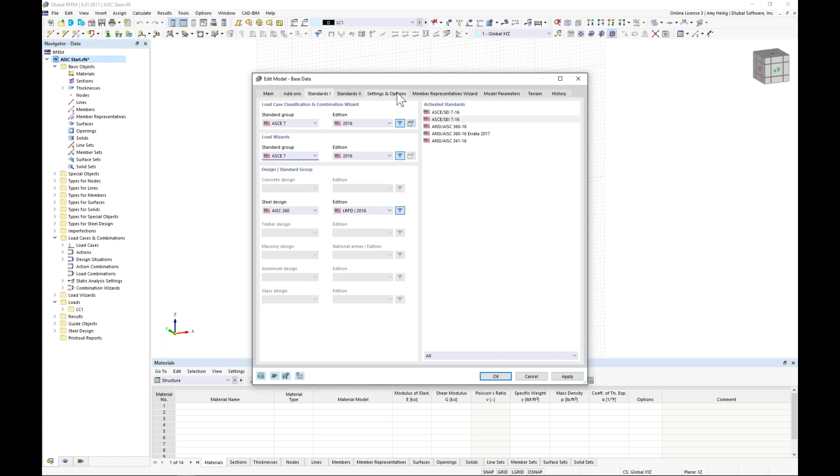Under settings and options, this is where we can orient our global and local axes - both are set to upward. I've also activated the member representative, which gives us the ability to group together members with common materials, cross sections, or member lengths. This will come into play a little bit later on.

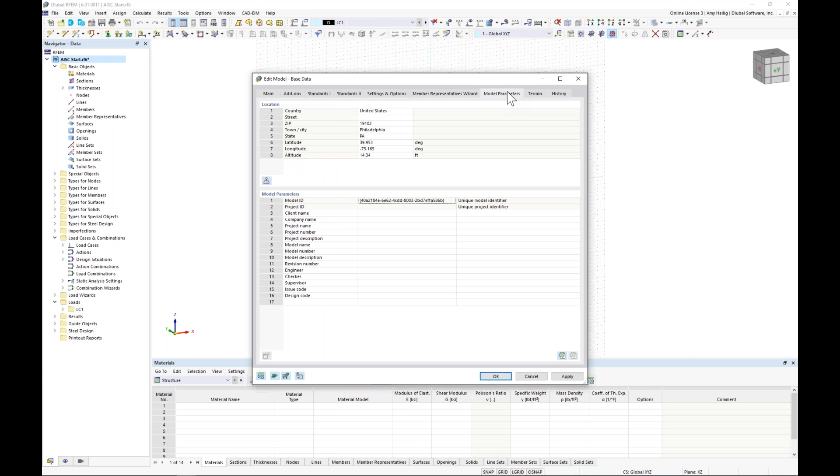Finally, we have model parameters, which gives us the ability to integrate with our GeoZone tool available on our website. For those not familiar with GeoZone, we have integrated various standards, including ASCE 7, the NBC standard, and many other international standards for snow, wind, seismic, and tornado loads.

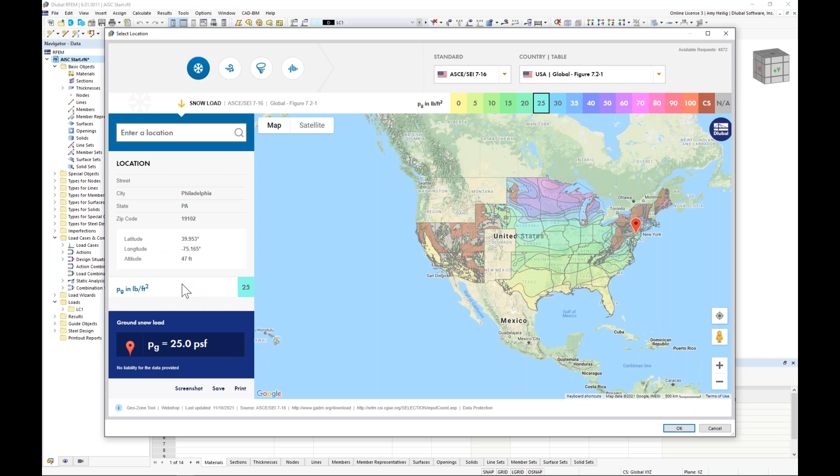This is further integrated with Google Maps technology, so we can simply type in our project address. I typed in Philadelphia, PA, and I have my ground snow load automatically given to me based on the maps provided within ASCE 7. This will be used later for our automatic snow load generator.

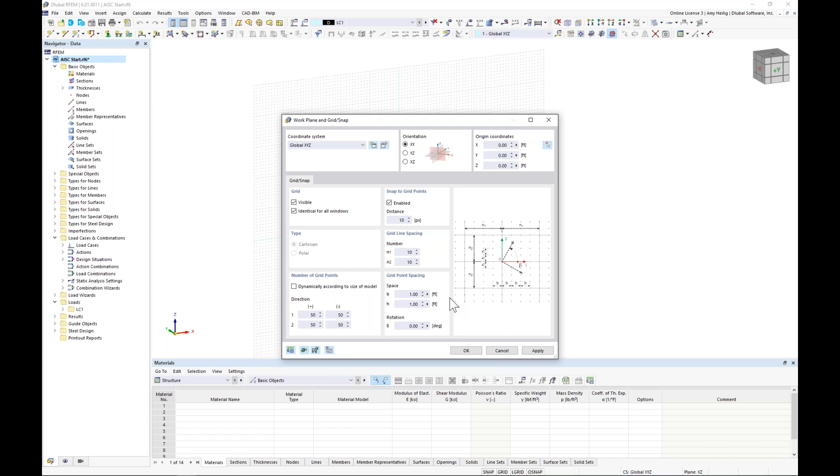Once we've set all of this input, we click OK to be brought into our model. Within the graphical interface, I have my drawing grid activated. Down here at the bottom I can right click to edit this drawing grid. The grid point spacing is set at every 1 foot. If we see anything other than this, we can always click here to reset the default back to 1 foot spacing.

We'll begin by drawing our first member, going up to our toolbar to draw a new single member. The member type is set to beam. The section is defined within my cross-section library, so I can activate my standard steel sections, and use the filters on the left to filter to the United States, the AISC 15.

And the W sections are now available to us here, where we can scroll down and choose a W14 by 48. So once I have my cross section selected, I do need to create a new material.

So in a similar manner, I'll open up my material database. I can again use my filters over on the left to choose the United States, the AISC 360, and we'll see here steel A992 available to us that we can click OK.

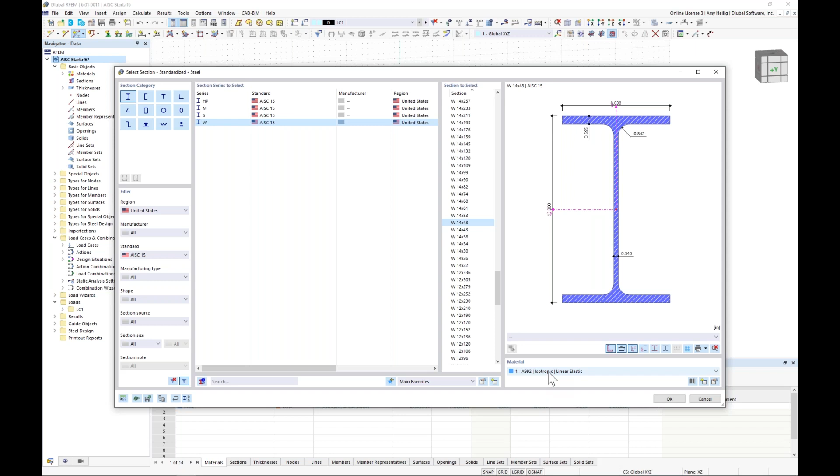Now this material is available for all members within the model. I don't need to redefine that material each time. I can just select it here within this drop-down box.

So once I click OK, I'm going to go back to this main tab here and deactivate the design properties. This is specific to steel design according to the add-on that we have previously activated. We'll get back to this later on, but for now, I want to deactivate this option.

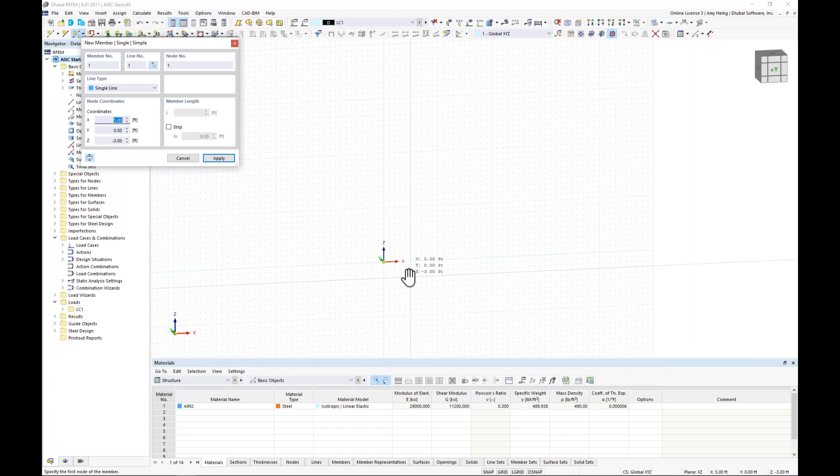So we'll begin with our first column by snapping at the origin here and a point 14 feet in the global Z direction. My second point is going to be located at x equals 40 feet, and then we're going to go ahead and choose again that same point of 14 feet in the Z direction.

Now I'd like to create a node that's really right at the center of these two nodes at the tops of my columns. For this, we have a nice feature within our drop-down box here that we can create a node between two adjacent nodes.

So what we can do is graphically select the nodes at the tops of my columns. And when I click apply, you'll notice we get a third node generated here. Well, this node is really dependent on these two nodes that we've selected graphically.

I can even take this column and move it around, and you'll notice that that node moves with it. We can also take this node, double click on it, and you'll notice the node type is set between two nodes.

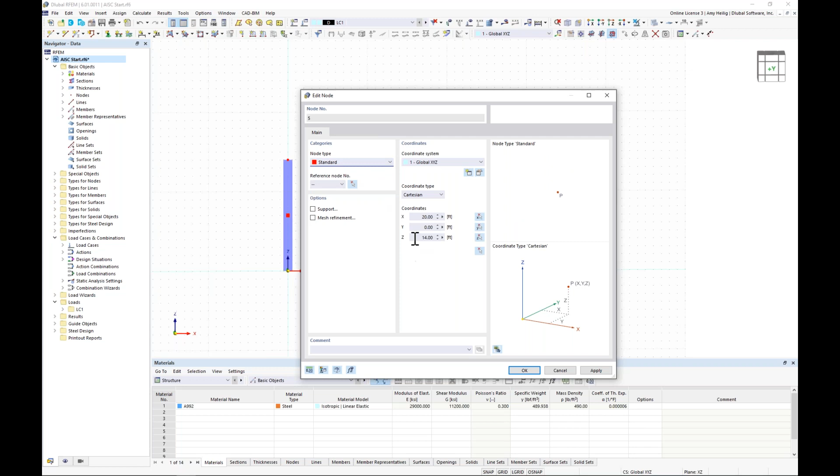Well, if we want to edit it, we can simply change this back to standard, and I can modify my Z coordinates to 16 feet in the vertical direction.

So we're now ready to generate our beams for our first moment frame. So I'm going to go to draw a new member once again. I'm going to deactivate the design properties.

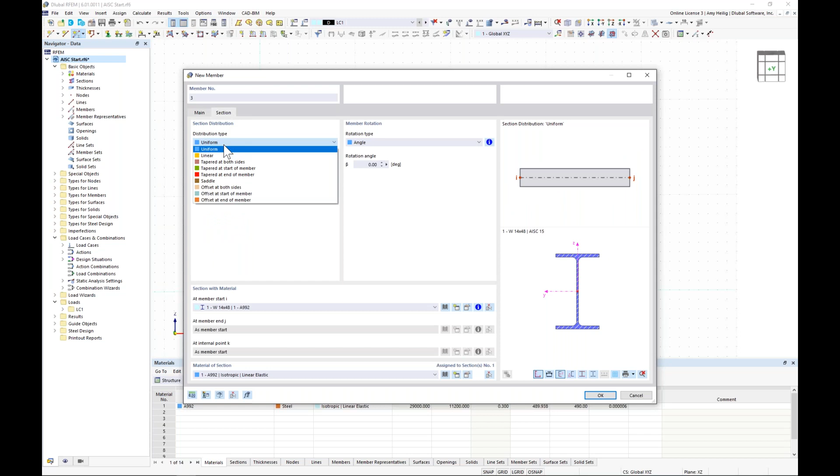And under the section, I'm going to choose here under distribution type, tapered at the start of the member. So previously in RFEM 5, if we had any type of taper, we had to completely create a new member segment here. But in RFEM 6, we have the ability to integrate this taper directly within this single member element.

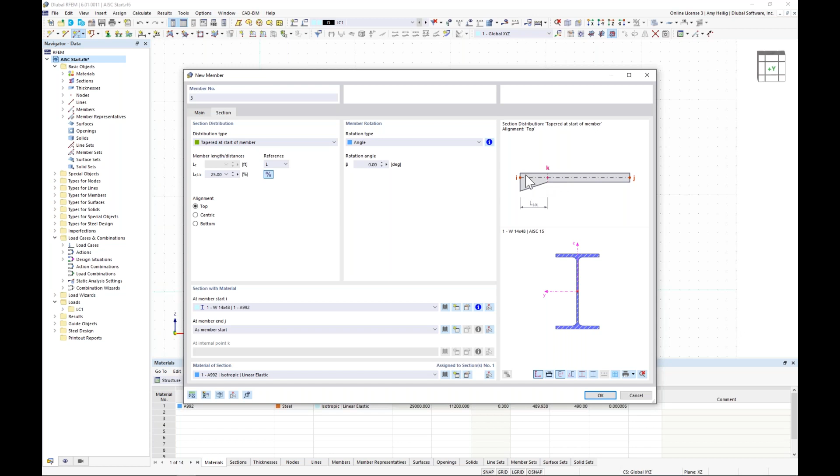We can set the member taper length, and this is set at 25% by default. We can additionally set the alignment. So if I set this to top, notice that the top of member is completely flush here.

Well, we do need to create a new cross section. So for my member end, I'm going to go back to my W sections and scroll down here to a W12 by 26.

Remember, I don't need to define the A992 material again. It's already available to me here and I click OK.

But I also need to create an additional cross section for my taper start. So I go back to my cross section library. I choose again that same W12 by 26, but we have a feature over here in the left corner where I can convert this into a parametric section.

So when I click this option, it's now imported all of the cross-section properties from that W12 by 26, but I have the ability to modify any of the properties here, such as the depth to 24 inches.

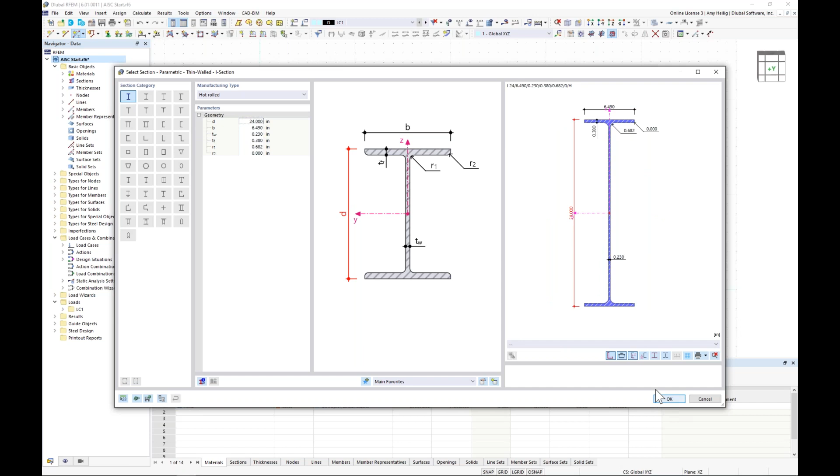And I click OK. So once we click OK through this additional dialog box, we can set that parametric section as the member start, but at the member end, I want to choose that W12 by 26 that I previously defined.

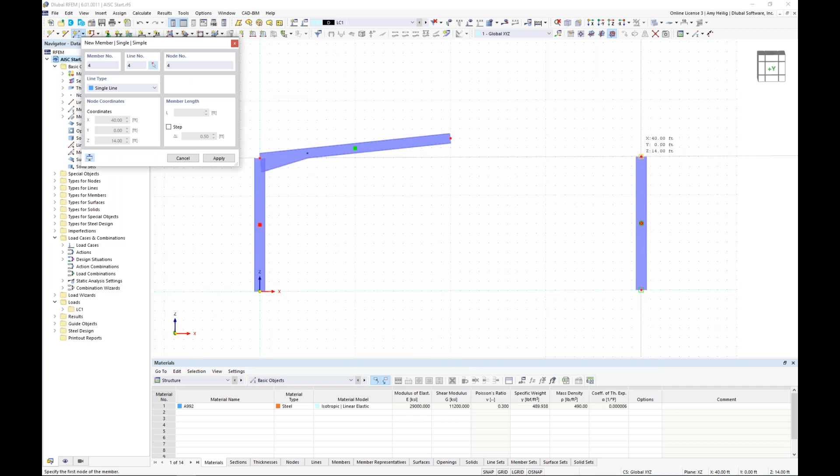So when I click OK, I will start at the top of my column, and my second point will be up to that center point, and I do the same thing on the right-hand side, and now we can see those beams generated with the taper available to us here.

So these color codings are the member representatives. I'm going to turn those off for now. We'll get into them a little bit later. I'm going to highlight all of my member elements here.

I'm going to right click, and under the members option, I have the ability to divide the member by a set number of intermediate nodes. I'm going to create one intermediate node, and choose the option to create the node along the member without actually dividing the member, so that node will be integrated as part of the member element itself.

I click OK. If we turn this into wireframe view, we can see these nodes in a different color, blue here, generated at the midpoint of each element.

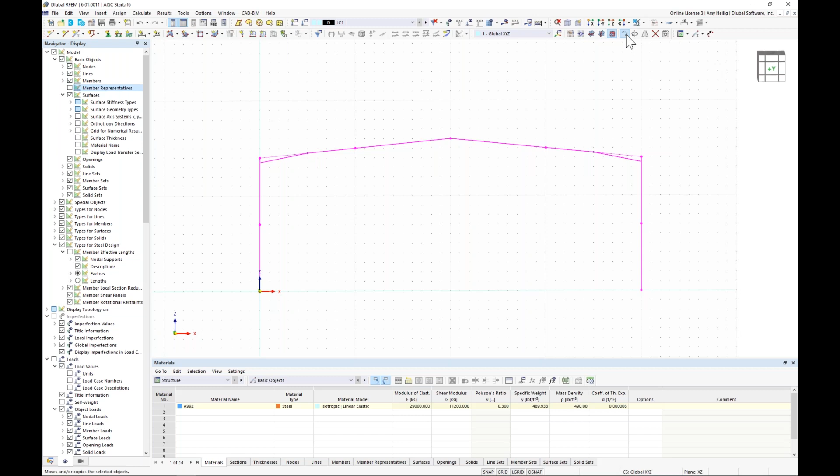I'm going to highlight all of my elements here, including those new nodes, but I'll hold down my shift key to deselect the nodes that define where the taper start should begin. I'm going to utilize my move copy tool and create a copy, creating 3 total copies in the global Y direction of 16 feet.

Under the numbering and options, we have this ability to turn on the step links. When we do this, we get a new tab that allows me to create members between copied nodes, so this is just a little bit of a time saver here.

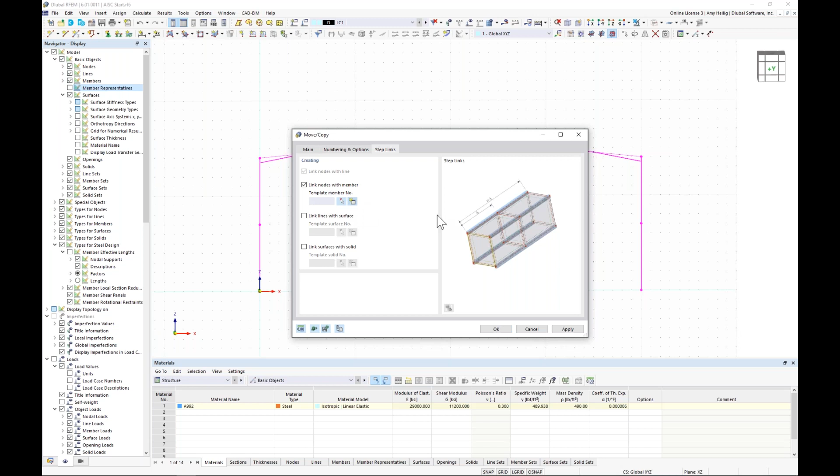Now, if I don't have the available cross-section I'd like to use, I can simply create a new one. This should bring us into our familiar dialog box for creating a new member element. Turning off the design properties, the member type here is going to be truss. A truss applies that moment release at either end of the element, so you can see the hinges option is now grayed out.

Under the section, we'll create a new cross section, and we'll go into our cross section library, but this time we'll choose an HSS. We choose the square HSS, and scroll down to 6 by 6 by 0.375. Now I do need to create a new material, so I access my material database and choose steel A500, selecting A500 grade C for shapes on the right-hand side.

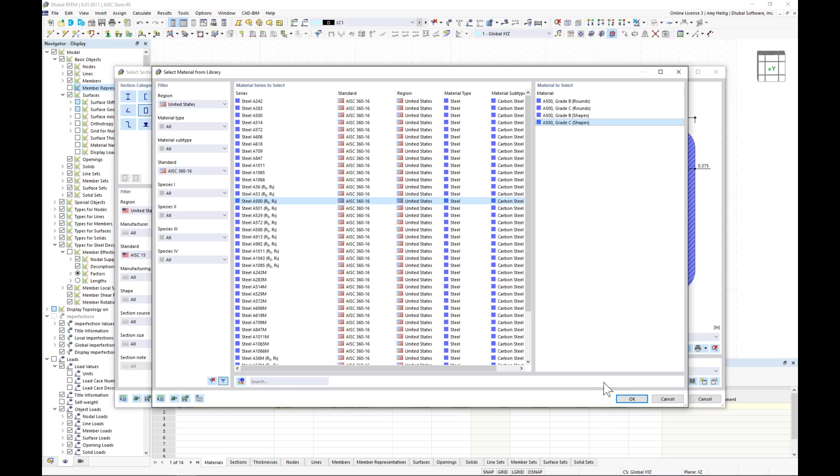I click OK through these dialog boxes, and remember, we're still in this move copy tool. So once I click OK, what I should see are those HSS elements generated between those copy nodes.

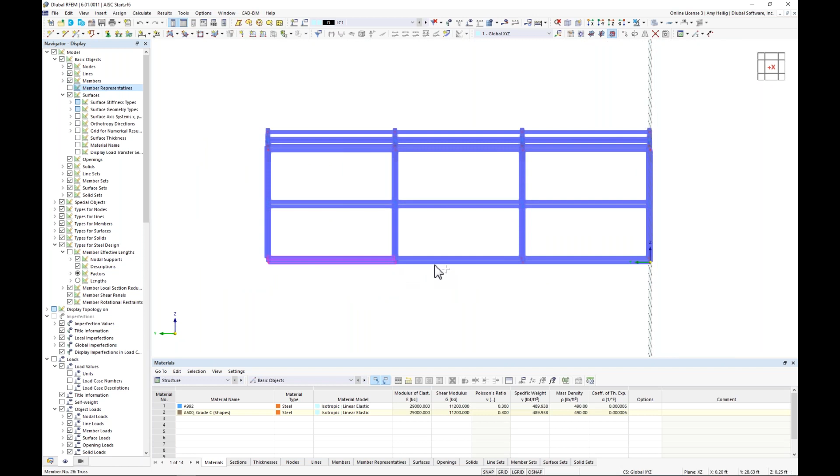Now, one thing I want to do at the bottom is hold down my control key to select all of these bottom HSS elements. I'm going to double click, and change the member type here to coupling hinge. This is actually some type of rigid element, with very high stiffness. We don't need to specify a cross section or a material - all of that's handled internally with a very high stiffness, and a hinge will simply release the moment at either end.

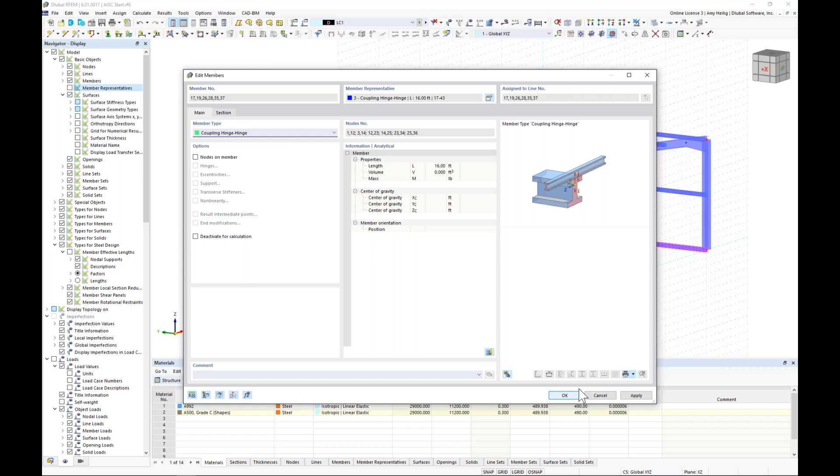The reason why I'm doing this is we will be defining surfaces for the facade walls for the entire structure, and I want all of the loads at the lower part of the structure to be transferred back to the bottom of my columns and into those foundations. We'll see that once we generate those surfaces.

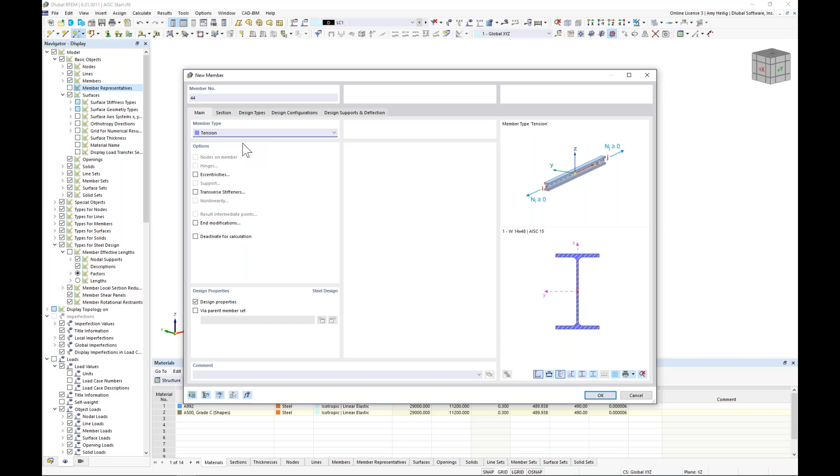So I'm going to continue on here to draw my X bracing now. I will go ahead and draw a new member once again. The member type now is going to be tension only, which again applies that member hinge at either end. Additionally, if there's any compression within this element, it will be completely removed from the calculation, so it can only take tension forces.

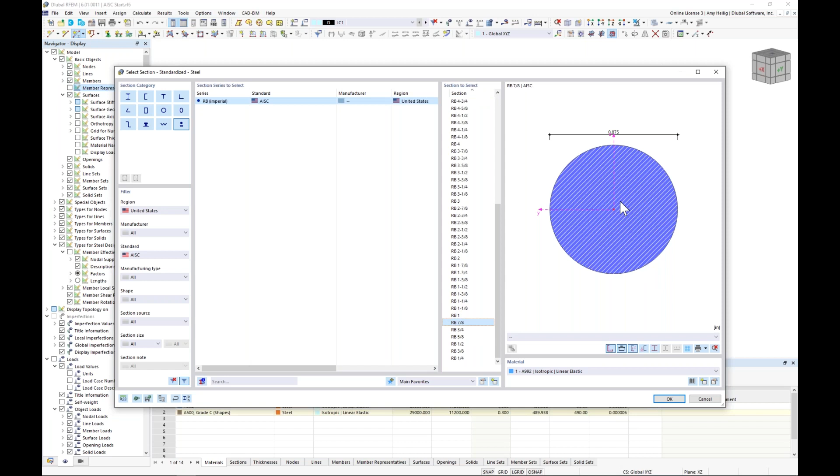We'll turn off the design properties, and under the section tab, create a new cross section. I could either choose that under my parametric bars from my X bracing, or we have bar sections here according to the AISC - same concept. This allows me to choose a 7/8 inch diameter round bar. Creating one more material type, I want to select A36 for this element.

Once I click OK through these dialog boxes, I can turn this into wireframe view, and snap from one corner point to the other. You can see I slightly missed that one, but no problem, I'll fix that in just a minute. Then we can do the same thing up here at the top of the structure.

Fixing this point up here is really just as easy as dragging and dropping, and that will snap to that point. Now selecting this lower X brace, I can hold down my control key to drag and drop and make a copy here as well.

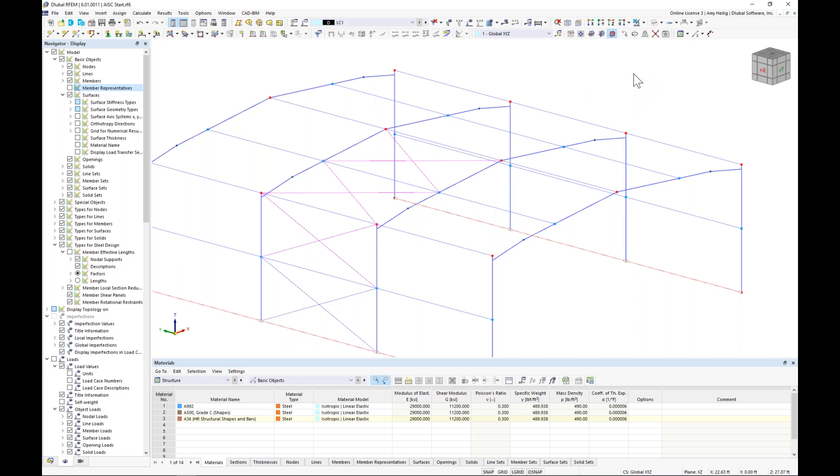Now we can do the same thing at the top. I hold down my control key, drag and drop, and make a copy. Additionally, I can select all of my braces here by holding down my control key on the left side and take advantage of my mirror tool.

The mirror tool is similar to what we'd see in AutoCAD, where we can create a copy. We'd like to mirror about the YZ plane, and I'll choose my mirroring point, which will be right here at the center of the structure. I click OK, and now we can see that X brace generated on the other side.

It looks like one was additionally forgotten here, but no problem. We'll go ahead and drag and drop that down to the bottom element there.

Now that our X bracing is complete, I'd like to finish the front and rear of this structure with some additional columns and wall girts. So we'll turn back on our drawing grid, and I'm going to snap the drawing grid origin to a new location. I can do so with this option up here in my toolbar, and I choose this point where my HSS intersects this tapered girder here at the end.

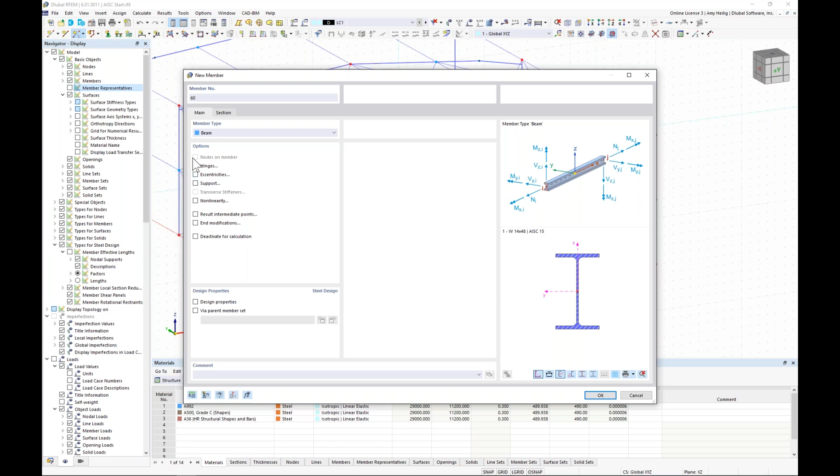My additional column will require me to generate a new cross section for the last time. We'll turn off the design properties, and I'm going to turn on my hinges here. Under the section, I'll go back to my cross section library, and we're going to choose a smaller section, a W8 by 31. A992 material is good. I click OK.

Now, under the hinges tab that we've activated, everything for a beam element is considered fully fixed. So if we'd like to apply a moment release, we need to create a new member hinge at the member end. I go in here to create a new member hinge type.

We can see our 6 degrees of freedom. The program automatically assumes we probably like to release the moment about the local Y and local Z axes, so I can go ahead with that suggestion. Now this member hinge definition type is always available for any future members within this model.

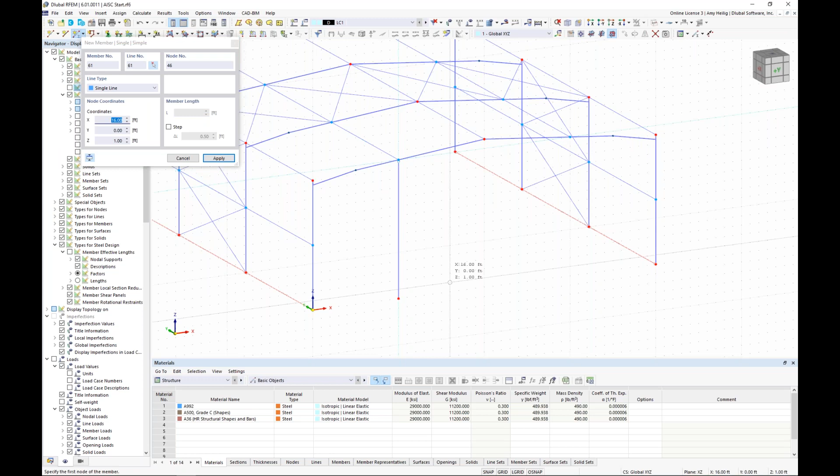I do not need to redefine that here, but rather just select it from my drop-down box. Once we're done, I click OK, and I'll snap from the bottom of the structure up to the top. So this is my front-facing column here. I'm going to take these two elements, hold down my Control key, drag and drop to make a copy.

Now, of course, we want to snap these members to this column that I just created. What we can also take advantage of is our object snap settings. So down in the lower right corner, if we right click, we see a lot of options, again similar to AutoCAD, including perpendicular. This allows me to take this node here, and the program will automatically detect the perpendicular point and allow me to snap exactly to that element.

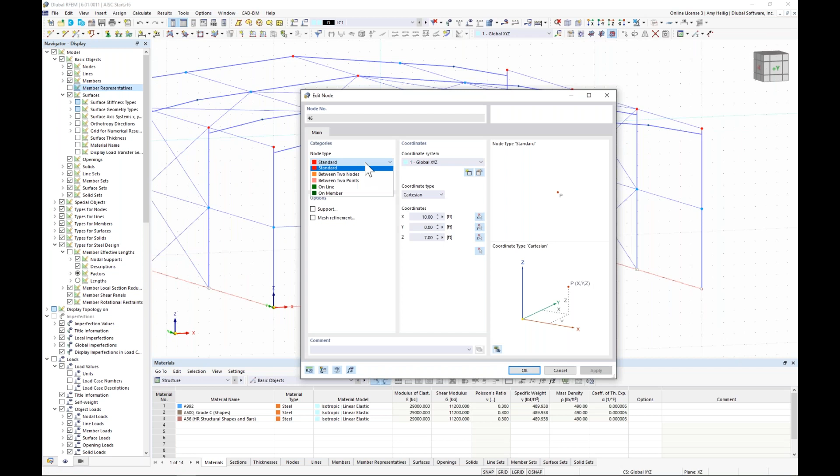Now for the bottom rigid element, it's really just as easy as snapping to that bottom node. But we have one small problem here: this node is not detected along this member length. We can simply fix this by double clicking on the node and changing the node type to on member.

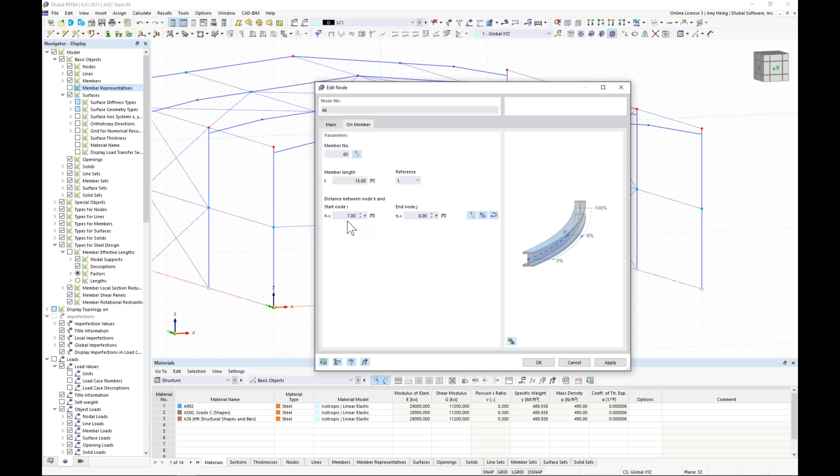On the second tab, the program tells me we'll go ahead and choose the member it's associated with, so we'll choose graphically member number 60. Then I want to tell the program graphically where this node along the member should reside. We can see that is set at 7 feet. I click OK, and now that node has changed color to blue.

I can take all of these elements and make additional copies here for the front of the structure, and I'll take these two final elements, hold down my Control key to make my last copy. Now up here, we need to connect this column up to the node, so we just drag and drop, and everything is complete at the front of our structure.

Now I'm going to highlight all of these elements here, including the nodes and the rigid elements down at the bottom.

I hold down my Control key. I can drag and drop to make a copy at the rear of the structure.

So most of our member modeling is complete, but now what I'd like to consider are our facade walls. And I really am not interested in modeling these facade walls with a set material and thickness and designing them. I'd rather use them to transfer loads back to my members.

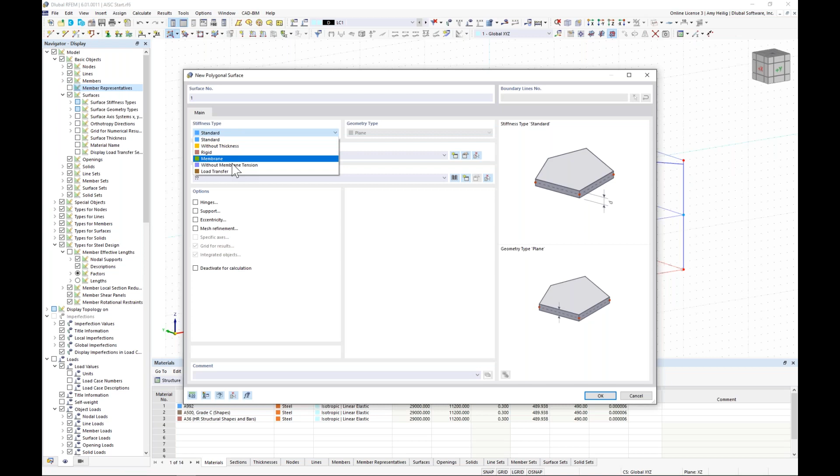So we have a new feature within RFEM 6: if I use my drop-down box here to draw a new surface, I can choose a polygon. The stiffness type can be set to load transfer, so notice I'm not going to be able to select a material or a thickness. It's really only used for load distribution.

And under the second tab here is where I can select whether this is one-way or two-way area load distribution based on the local axes of this surface. So we'll go ahead and select one-way area load distribution in the local X direction.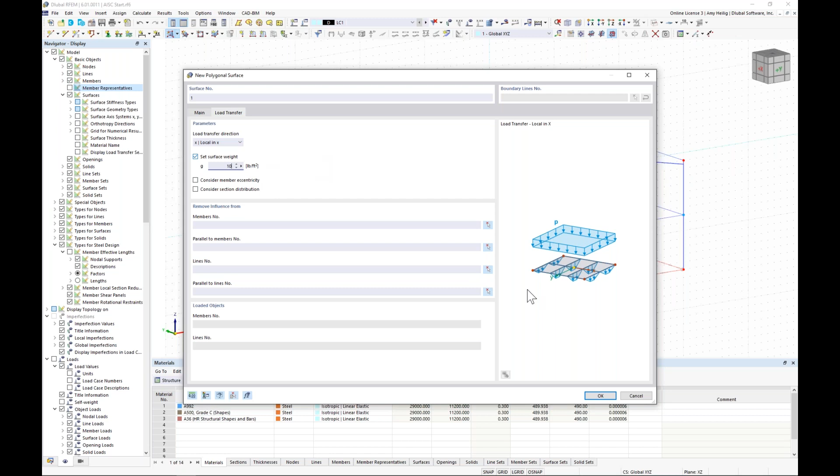Additionally, I can set a surface weight for these facade walls. So if I want the self-weight to be considered within this model and within the static analysis, I can go ahead and set 10 pounds per square foot for this new surface type.

So what I want to do is go ahead and snap to the coordinate points of my surface for my front wall. I'll turn off my drawing grid down at the bottom just to make this a little bit easier. Currently in a rendered view or wireframe view, it's a little difficult to see these surfaces—you'll notice only a dotted line is created. Every time I'm closing the surface with that final point, I just double click.

We'll go ahead and generate the surface at the left side of the roof here, and then we have one more surface to generate here at the back.

Once we are complete with this, just to give you guys a better sense of what's going on, we can turn this into a rendered view. Here are all of these surface elements, again with no stiffness, just being used for load distribution.

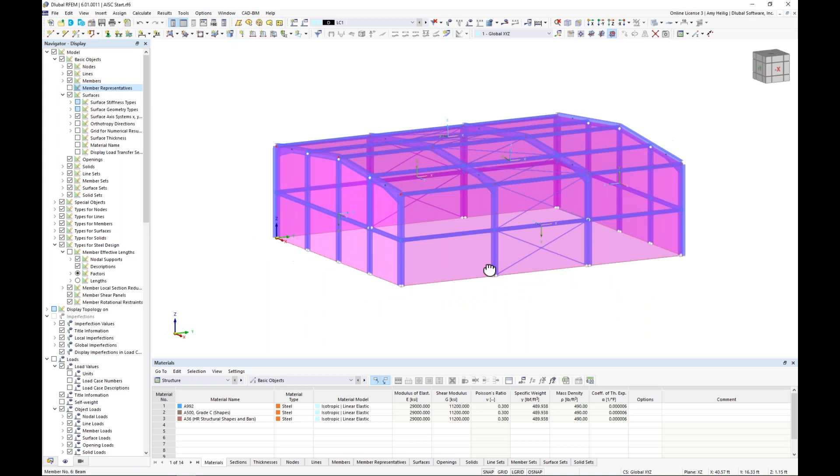I also like to right click and turn on the local axis system of the surfaces because I'm choosing a one-way area load distribution. I wanted to ensure that all my local X axes are in the horizontal direction, and they are. So we can right click and turn off those local axis systems.

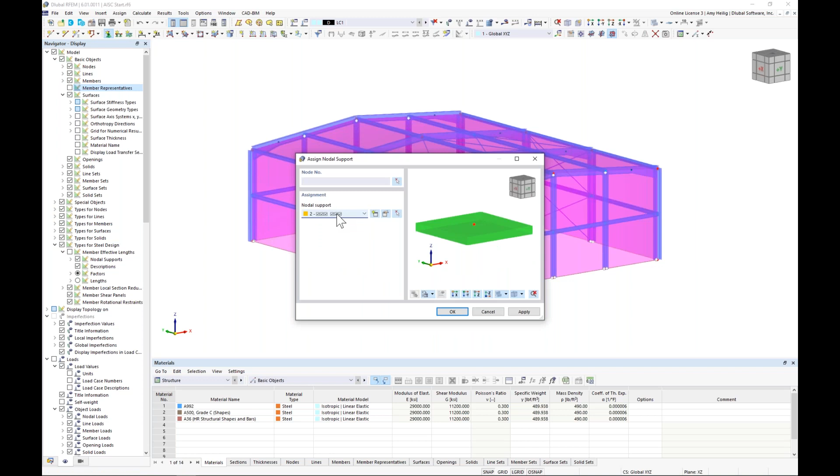The final thing to do is to support the structure. So we can go up here to a new nodal support. Within this option, we have several defaults, such as a pinned support, a fully rigid support, some roller supports, or we can always create our own. When we create our own, we have our 6 degrees of freedom—3 in rotation, 3 in translation. We can set partial fixity here with spring constants or non-linearities.

So let's say we want it to fail in uplift—this is possible, along with sliding and friction. We can define those with non-linear options. For today, I just want to choose the default pin option here, and I click OK.

So then this allows me to highlight over the bottom of all of my elements to apply that nodal support at the base of each column. I can also right click on these supports, and you'll notice we have a nice slider here where we can decrease and increase the size.

So once those supports are generated, our modeling is really complete. So I want to move into the definition of the load cases themselves.

So we go up here to edit our load cases, and you'll notice we already have a default load case set here. I'd like to give it a load case name of dead load, and self weight is automatically turned on—so the self weight of our members, remember we set that self weight for our facade walls, for the load transfer surfaces. The action category here is set according to ASCE 7, so the program knows which load factors to apply to each load case.

So we leave this one as dead load. We create our second load case, which is going to be snow load with the action category of snow—notice self weight is turned off here. And we create our final load case, which is going to be wind in the positive X direction with the action category set to wind.

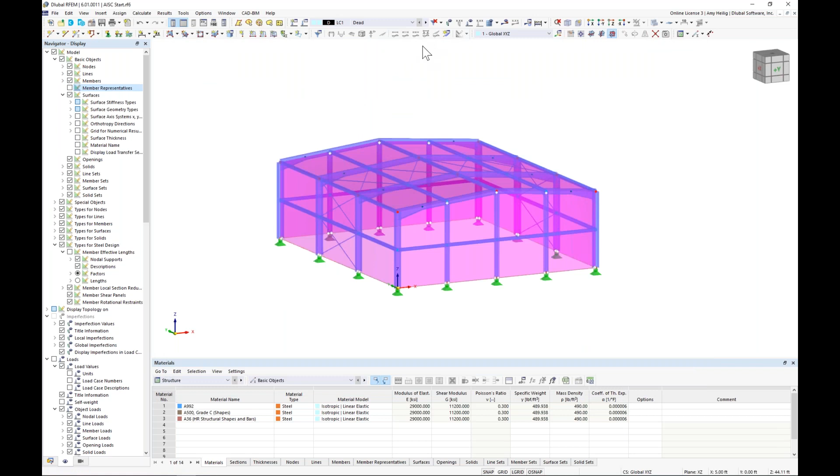So we've generated these three load cases here within our dropdown, but we actually need to apply the loads to the structure. For my dead load, I really don't want to apply any additional loads other than self-weight, except for pre-stress of these X-brace members.

So how I can do this is to go into my project navigator, and we have a nice feature here within the Views tab that allows me to select members by type graphically, and I can choose my tension-only members. Notice everything else is grayed out, and this gives me the ability to select all elements here, which will be only my X braces.

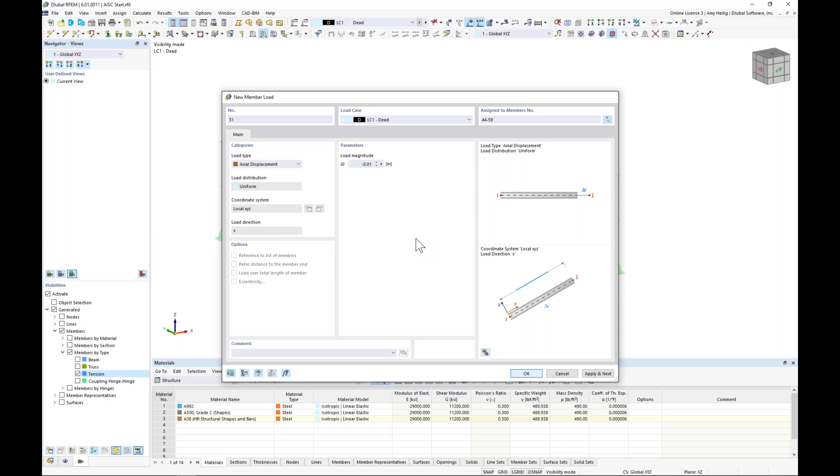We can begin by drawing our first load within the structure. I'll go up here to draw a new member load. Now, the load type is going to be axial displacement for that pre-stress, and the load magnitude will be negative 0.01 inches in the local X direction. So when I click OK, that load is automatically applied to all of these tension-only members, and we can see that graphically shown to us here.

So once we're done with the dead load case, we want to move on to snow load. And I previously mentioned that we do have our snow load generator available to us according to the ASCE 7. This can be seen under the load wizards tree within our project navigator, and we'll see here snow loads, which I can double click to create the snow load generation.

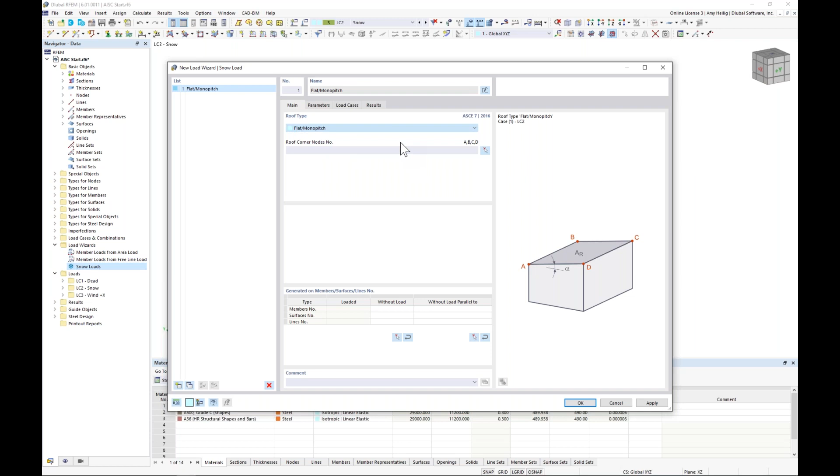Now, the roof type can be flat, monopitch, or dual pitch. Anything outside of this basic rectangular shape, these snow and wind load generators cannot be used, so you will have to manually apply those loads instead. But for today, our structure does fall within this geometry.

So then what we can do is select the roof geometry graphically here. I go around and pick each of these four points. I double click for my last point, and now the roof geometry is recognized here within this dialog box.

Under the Parameters tab, remember we have already set the project location according to the GeoZone tool back when we first created the model. So inevitably the address is shown here, but we're also bringing in that ground snow load directly from those ASCE 7 maps, so nothing to do further here.

Now I may want to make some adjustments according to the terrain category, the roof exposure, or the risk category, because as we know, this is going to affect the magnitude of my snow loads. We'll just go with the default options for today. And under the third tab, we have the ability to generate the balanced snow load cases, but also unbalanced. For our simple example today, we'll just create the balanced snow load.

The program is intelligent enough to go ahead and place this under load case 2 for snow load. So when we click OK, what we should see now is a new generated load at the top of our structure. We can right click to display this load separately, and under my project navigator within the display tab.

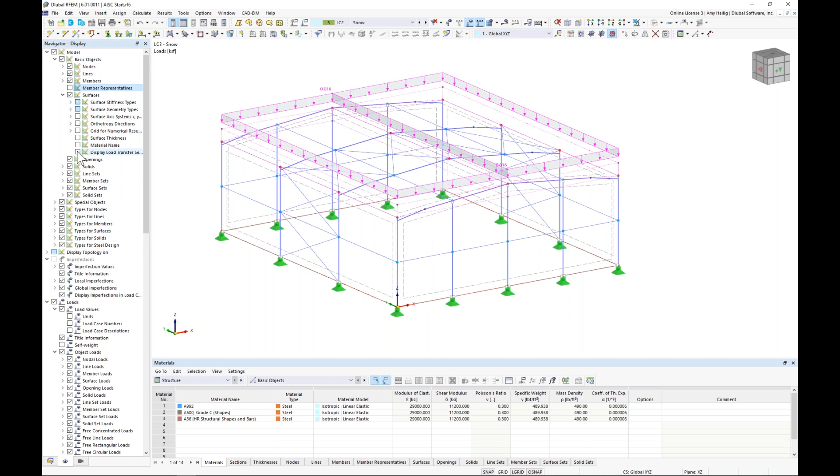Up at the very top here, I have my basic objects for surfaces, and here is where I can turn on the display of the load transfer separately. So the surface load is being applied to those surfaces. When I turn on this feature, the program shows me, based on the tributary area, how exactly that load is going to be distributed to each of these moment frames.

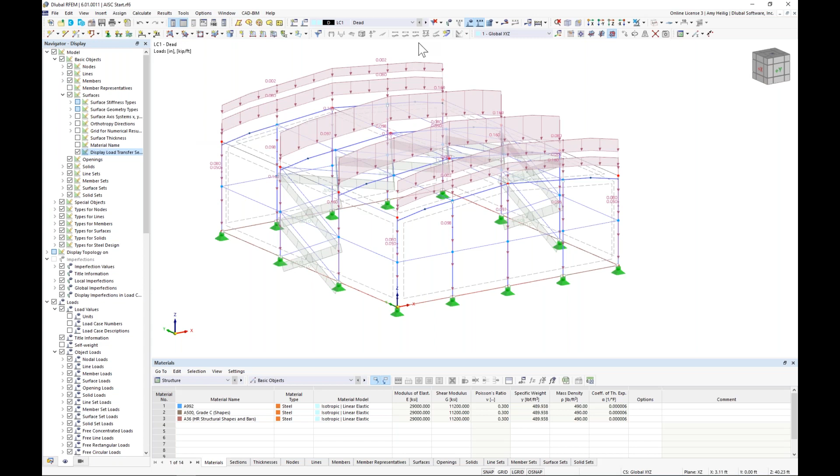And by the way, we can also go back to the dead load to see the same concept for that self weight of 10 pounds per square foot that we applied to all those surfaces as well. So now we are complete with our simple snow load case.

We'll move on to the wind load. As mentioned, the wind load is still in development according to the ASCE 7. So it's really as easy as applying some simple surface loads here to represent that wind in the global X direction. We'll start off with a new surface load up here in my toolbar.

And we want to set the load magnitude as 0.015 kips per square foot in the global X direction. We can see my global axes down here in the lower left. Now I want to assign this to my first surface over on the left, surface number 4. If I hit apply and next, notice I'm still within this dialog box, but that load has been applied in the background.

So this gives me the ability now to modify my magnitude for a suction force, but I'll apply this at the rear facing wall here. I click apply and next. We should see that load generated in the background.

I further adjust my magnitude to negative 0.008 kips per square foot, but this time in the global Y direction, and I'll choose this front-facing surface for an interior suction load as well. I hit apply and next. We just remove this negative sign for my surface in the back. I click OK, apply and next.

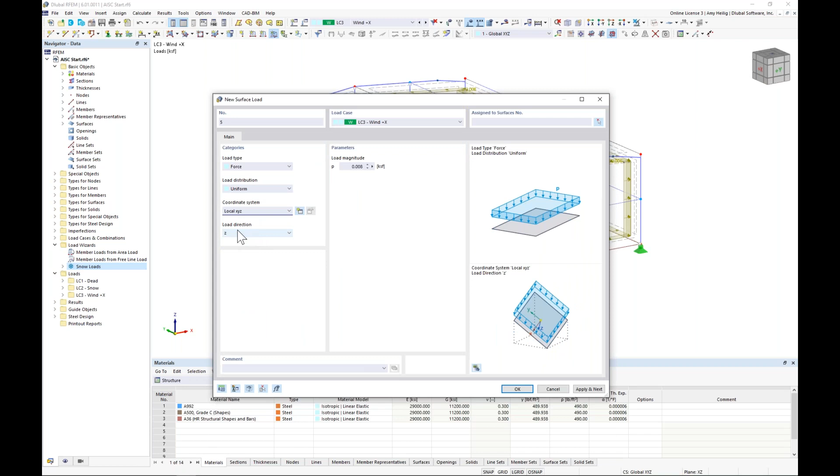And now the final load is going to be the same magnitude, but this time we want to change the coordinate system to the local X, Y, and Z axes. So this will be applied based on the local axes of my roof surfaces here. Since they are at an inclination, I want this wind load to be normal to those faces. So we set this according to the local Z axis for these surfaces, and then I can graphically select the 2 roof elements here. I click OK, and now we're finally done with our wind in the X direction.

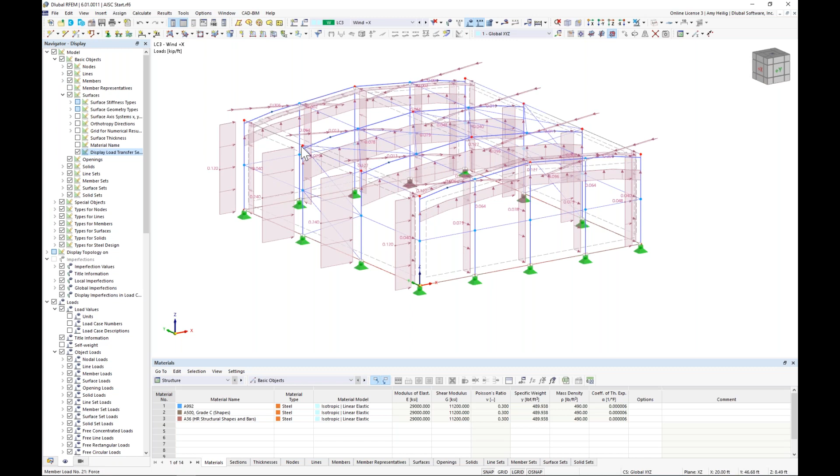Now again, we can go back to displaying the load transfer separately here. This is just based on the tributary area of all of our elements, since those are surface loads applied to the surface load transfer elements.

Okay, so now that we are done with wind in the X direction, I'm going to go back to my project navigator, and I can view my load cases within my additional tree settings here. So I expand out the load cases and I see dead load, snow load, and wind in the X. I can right click on wind in the X and choose this quick option here to copy the load case. Immediately my dialog box opens up, which we've seen before, and I can just change this to wind in the Y direction.

Well, the benefit of this is that we'll see wind in the Y direction has also copied all of those same surface loads, so I don't need to redefine those. All I need to do here is to adjust the magnitude. Now I could adjust the magnitude by clicking on each one of these surface loads, or we can also take a look at our load input data directly within our table options down here at the bottom.

So I use my drop-down box to select loads, and I'll find surface loads down at the bottom. Under wind in the positive Y direction, I just want to make some small changes here to my magnitude: negative 0.008 for my left facing surface. We'll go ahead and change this to positive 0.008 for the right. Now this front facing surface, this is where a majority of my wind load magnitude comes from, so we set this to 0.015 in the global Y. And then we're going to go ahead and modify the rear surface to 0.006.

So now the next topic to discuss, we'll jump back to the PowerPoint here to turn back to the AISC 360 Chapter C, Design for Stability. And within this chapter, section C1, there are 5 requirements listed.

The first is flexural, shear, and axial member deformation. The second is that second order effects, including big P delta and little p delta, must also be accounted for when we're designing for stability. Geometric imperfections should be included, as well as stiffness reduction due to inelasticity, and finally, uncertainty in stiffness and strength.

Now, there are 3 different approaches given to us within the AISC that we can account for all of these stability requirements here. The first is the direct analysis method, laid out entirely within Chapter C. Alternatively, we can use the effective length method or the first order method, given to us in Appendix 7. But today we'll be focusing on the direct analysis method, and I want to hone in on items 2, 3, and 4 here and how exactly we can apply this to our structure today.

So taking a look at second order analysis laid out in section C2.1b, the first requirement is to take into consideration big P delta effects. This is essentially where the axial forces and their effects are having on the bending stiffness within the structure.

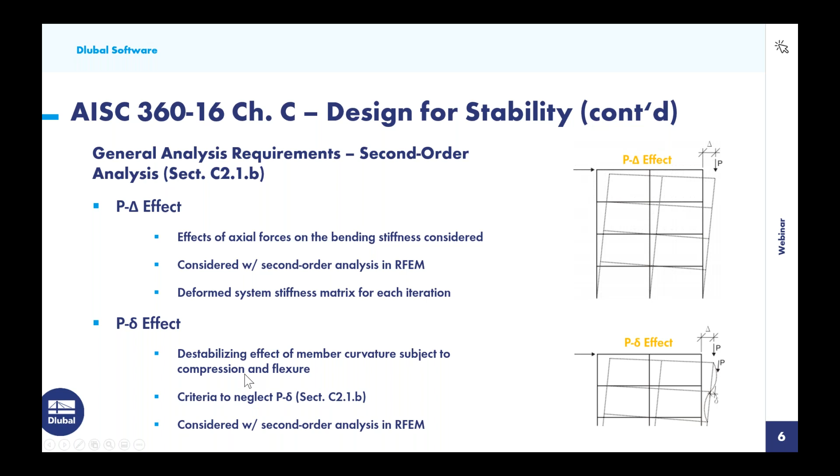I'll show you in a minute how we can apply those settings, but let's continue with item number 3 here, the consideration of initial system imperfections according to section C2.2. When we're talking about buildings, this is primarily column out-of-plumbness. Member out-of-straightness really doesn't need to be addressed within chapter C for instabilities because it's already considered within chapter E when designing members for compression.

Now there are two approaches for considering imperfections. The first is direct modeling, according to section C2.2a. The code tells us we can physically model these initial displacements due to loading and anticipated buckling mode shapes. The magnitudes are based on tolerances set forth within the code of standard practice, or on the known imperfection itself. So if we wanted to alter the geometry of our model to take into account those initial displacements, that is one way to account for imperfections.

Probably the alternative and maybe easier approach is the use of notional loads, given to us in section C2.2b. The equation directly from the standard is 0.002 times alpha times Yi. Alpha depends on whether we're going with LRFD or ASD limit state design. Yi is the factored gravity load at that particular level. From this equation, we calculate the notional loads that should be applied at each level.

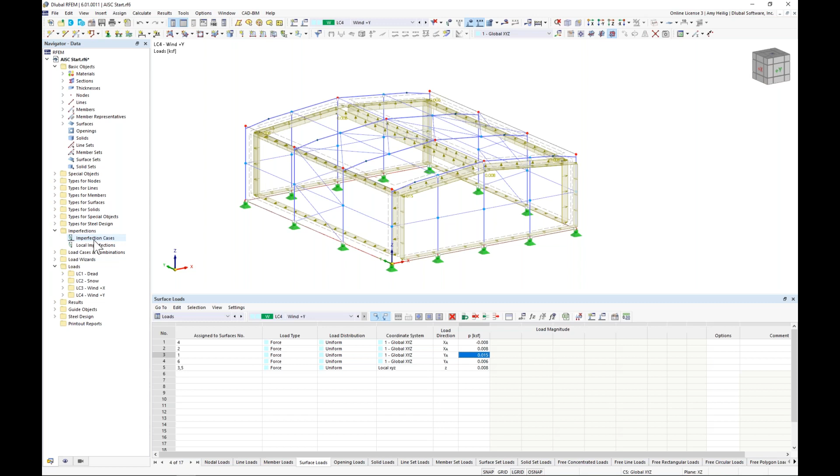So I right click to create a new imperfection case. And the first one will be imperfections in the positive X direction. Again, I have wind loads in the X direction, so I'm going to create my first imperfection or notional load case here, imperfections in the positive X direction. Under the assignment, I am going to tell the program to relate all of my imperfections in the X direction with wind in the X direction.

So now I'm going to create a copy of this, and now I have imperfections in the Y direction, and I'm going to relate this to wind in the Y direction. So internally, the program's smart enough to go ahead and apply the correct imperfections along with the correct load cases, which will be carried out within our load combinations as well, which you can see listed here. We'll go into this in a little bit more detail in just a minute.

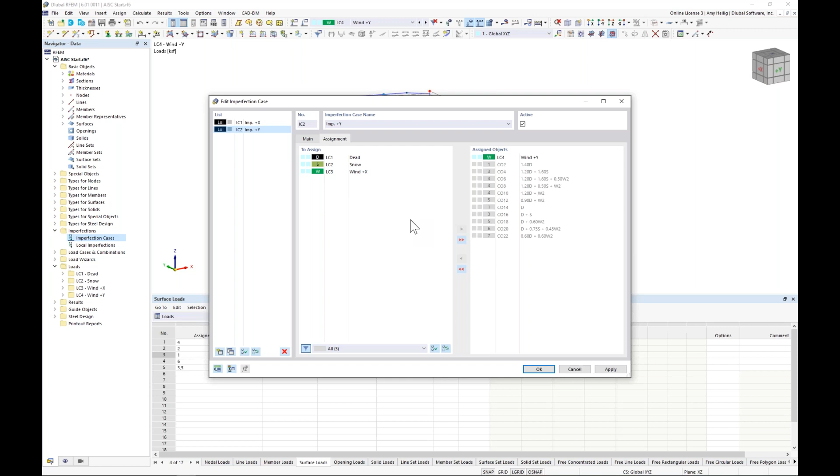So now that we have generated these imperfection load cases, we actually need to apply the imperfection to the structure. So we can do this by going ahead and clicking OK here. And before I do, I'm going to take advantage here again of my visibility options to filter the members by cross section. And I'm going to choose my vertical elements here in the vertical direction, so you can see my W14 by 48 and W8 by 31.

Now I can also right click to turn on the local axis system of the elements because this is important for my imperfections. So under my imperfections tree here, we can now see that we have imperfections in the X and we have imperfections in the Y. So under imperfections in the X, I'm going to right click to create a new member imperfection. And under the definition type, sure enough, we have available here the AISC 360-2016 standard.

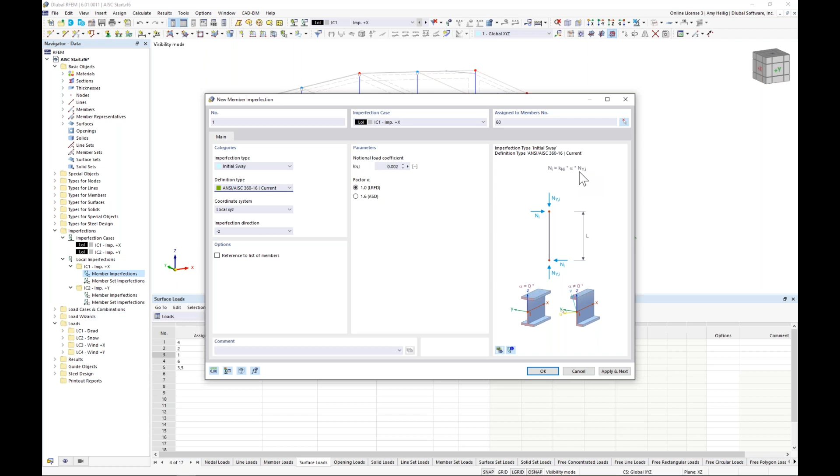We're going to see that exact equation that I showed in the PowerPoint, 0.002 times alpha times Yi. Now we want to apply these imperfections in the global X direction, which relates to the negative local Z axes of all of my members shown here. So then I can graphically select, let me pull down this table, all of my vertical members. I click OK, and now we can see all of those populated here.

I click apply and next, and now I can choose under my drop down here imperfections in the Y, and all I need to do is change the imperfection to the positive local Y axis. That's going to correspond with the wind in the global positive Y direction. I'm going to graphically select all of my vertical elements here once again. I click OK, and I can click OK once again.

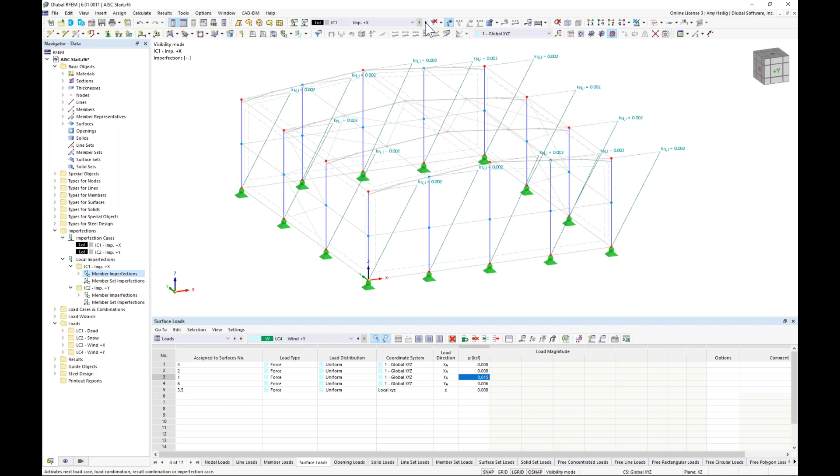Now, what we can see when I turn off my local axes is our imperfection cases available in our drop-down box, and we can graphically see these by turning on the imperfections up here in the toolbar. Here is our column out-of-plumbness, or our notional loads applied in the X direction, as well as applied in the Y direction.

So once those imperfections are applied, I just want to go into a little bit more detail about how the imperfections should really be applied to each load combination, because this can be a little bit complicated. So let us jump down to, let's say, our dead load here, and we can go into our load cases and combinations, which we've been here before.

Under the design situations, the program is automatically generating two design situations according to the ASCE 7. We have here our LRFD design situation, which is going to be our factored load combinations, and ASD, which is going to be our unfactored load combinations.

Now, within the LRFD design situation, you can see here it's active for steel design. So I'll be using this for the steel design add-on according to the AISC in just a minute. We have these options down here specific to each design situation. So I'm going to go into the edit detail settings.

It's important to know that all of the direct analysis method settings that we talked about in the PowerPoint are all controlled within this dialog box. So that's kind of nice that we don't need to jump around to all different areas of the program, but we're going to set everything here.

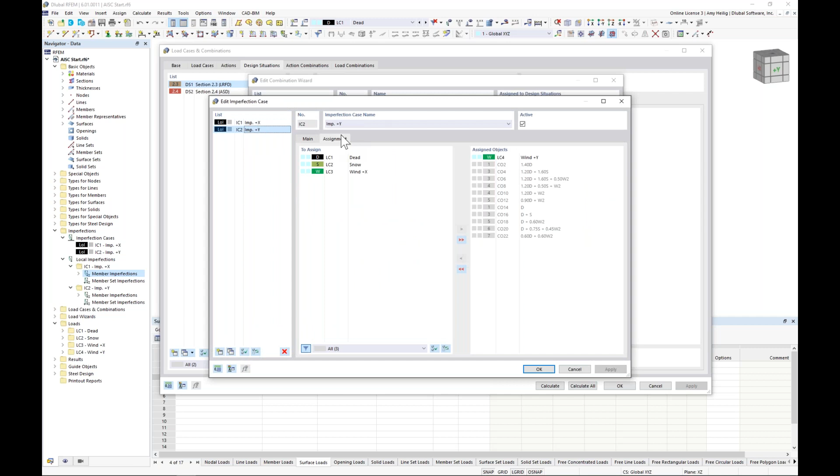The first is to turn on the imperfection cases for my factored load combinations. You can see that's automatically checked on by default. If I go into this edit button, this just brings me back to the imperfection cases that I've already seen before. So imperfections or notional loads are now taken care of.

Let's move on to a second order analysis accounting for big P delta and little p delta. Well, that's really just as easy as using this drop down box here. We see here linear analysis, but we want to set this according to second order P delta. So now big P delta and little p delta will automatically be accounted for in all of my factored load combinations.

Now, the final topic is our stiffness modifications, and we can activate this here with the structure modification. Now, I do want to create a new option here, and I'm going to activate the modify stiffness for my members. I now get a new tab, and under the member modification, I use my drop-down box here to select new member stiffness modification. Well, within this drop-down box, we have the AISC 360, 2016 available to us.

And we're going to see here tau sub B. When we have this set to iterative, it's going to take into consideration all of the equations for calculating the tau sub B stiffness reduction. Now, alternatively, we can set this equal to 1.0 if maybe we're applying additional notional loads instead. Now, we also have our bending stiffness multiplication factor here of 0.8, as well as the axial stiffness of 0.8.

So once we have defined this within our stiffness modification definition type, we need to graphically select the members that this should be applied to. Remember, the standard tells us to apply this to all members within our model, but notice I'm not applying it to the rigid elements down at the bottom. Those are not applicable there. So now I have created this stiffness modification. It is turned on for my factored load combinations, and all of my direct analysis method settings are now considered.

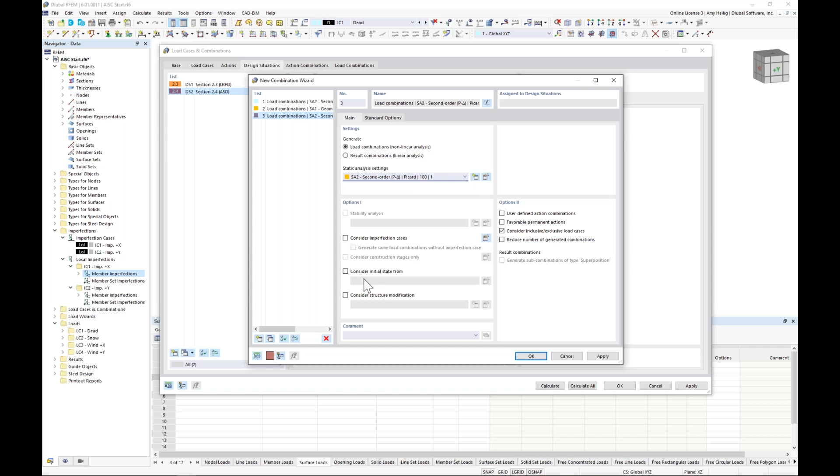Well, I can simply create a new option here. So we'll choose the new combination wizard option number 3. I'm going to select a second order analysis, but notice for this one, I'm going to leave off the imperfections and the stiffness modifications. So now within the LRFD, we're still referencing item number 1 here with those options set, but for my unfactored load combinations, we shouldn't see any of the stiffness modifications or notional loads applied.

Now we can confirm this under the load combinations tab, and here are all my factored load combinations, which we can see have imperfections and stiffness modifications applied. But if we jump down to the unfactored load combinations, everything's turned off. So now everything is set up accordingly.

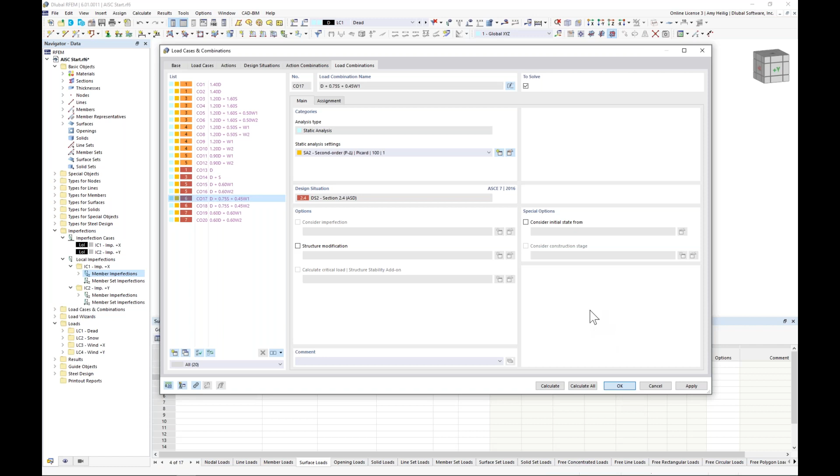Okay, so realistically, everything is ready for the full analysis calculation. But within RFEM 6, the huge advantage is that we now have integrated these design add-ons directly within the main program so that we can do both the analysis and the design at the same time. So let us switch gears now to talk about the design input for the Steel Design add-on that we activated at the very beginning of the presentation.

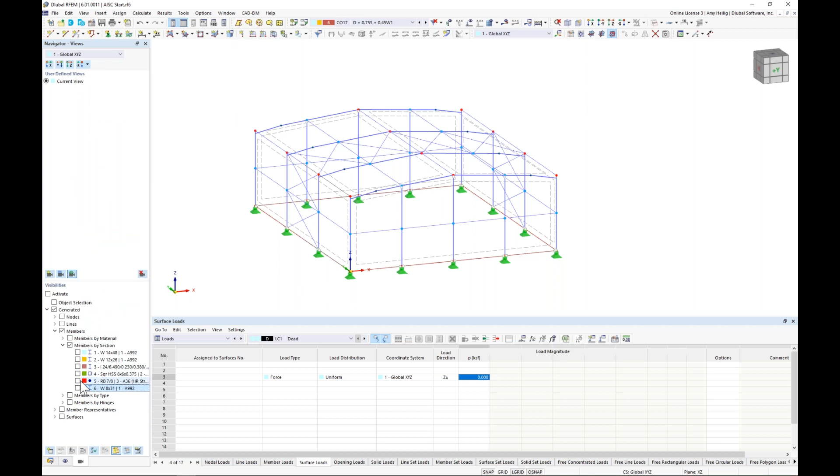So I really don't want to design all of my members. Now, realistically, of course, we'd probably want to, but for presentation purposes, I'm going to go ahead and use my visibility options here to only select those tapered elements up here along my main rafters for my moment frame. So I'm only going to design these elements.

Now, additionally, I'm going to turn back on my member representatives. So remember, I said that member representatives can group together similar elements that maybe have the same cross-section, the length, the material. So the program kind of recognizes here that all these are similar.

The problem is I'd really like to create a new member representative for my 4 exterior elements here. So what I can do in order to kind of divvy these up into a different member representative is really just as easy as adding something like a comment down here for each one of these elements. And under the comment, I can type in here 'end moment frame', for example. So when I click OK, what we should see, and I'll go back to my visibility, is a new member representative shown here in blue color. So now we have 2 different groups here just by setting a simple comment.

So let us begin with the design input, and I'll start off by selecting the member representatives on the exterior here, and I can double click on that colored box. Now notice that members 3, 4, 15, and 16 are part of this grouped member representative. Well, if I go into the edit settings here for these individual members, remember we had turned off design properties for all of those elements. I'm going to go ahead and turn those back on.

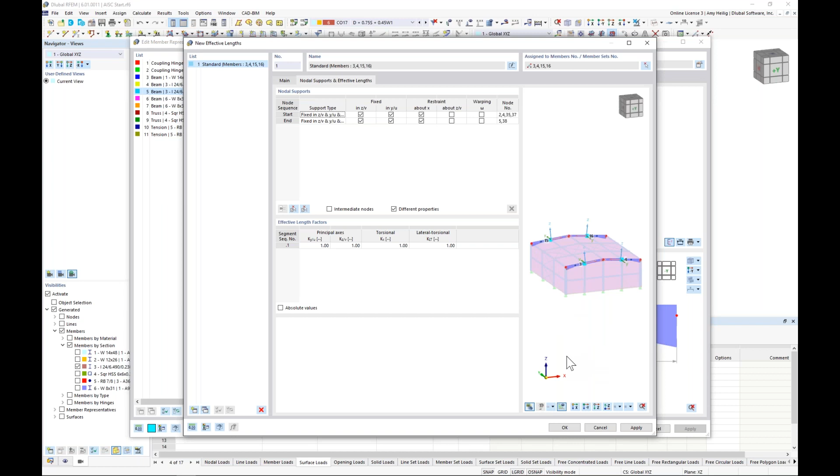The reason why I select them is so that my picture down here will update. I like to see exactly where I'm at within this dialog box when setting these intermediate supports. So I'm going to activate the intermediate nodes, and I want the program to automatically detect where the nodes exist along the length of the member.

Notice I now have a couple additional rows here. The program automatically sets by default the member start and member end intermediate supports. Our second node here is really irrelevant—that just defines where the taper start and end should occur.

But for the third node, if we rotate this around and zoom in, I'd really like to brace this element in the weak axis direction, the local y-axis direction. We also have this column framing up, so I'll assume the element is braced in the vertical direction as well. Additionally, I'll assume the member does not have the ability to rotate about its own x-axis, in other words torsion, so I'll go ahead and brace that too.

Now my effective length factors are all set in my table down here. We know that if we're designing according to the direct analysis method, all of our K factors can be set to 1.0. So now that I've set these intermediate restraints, I'll click OK, and I'll see these automatically updated here for my members.

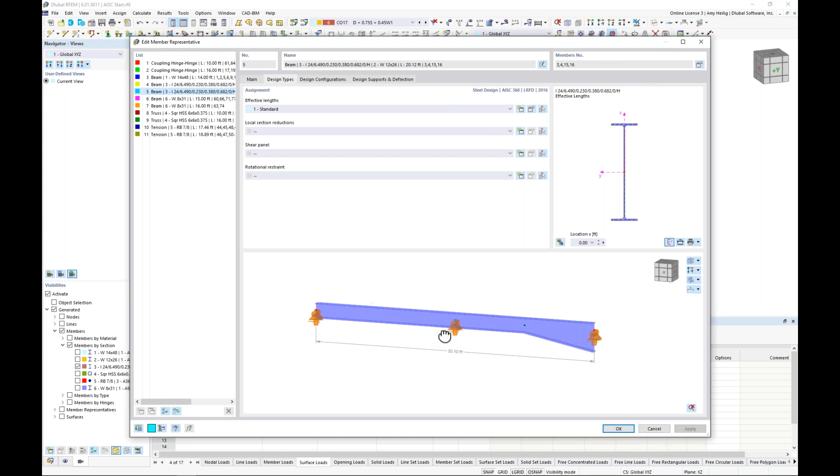Now I'm going to do the same thing for my interior members here, but we have slightly different provisions. The first thing to do is go into my details settings, and we need to turn back on the design properties. I'll click OK to make these settings for all 4 members at once. Under the design types, I want to choose an effective length here.

We'll go ahead and choose the eigenvalue method. Under the second tab, I like to graphically select these—not necessary, but helpful in determining where you're at along the length of the member. So we're going to have the program automatically detect the intermediate nodes, and 2 additional rows are given to us here.

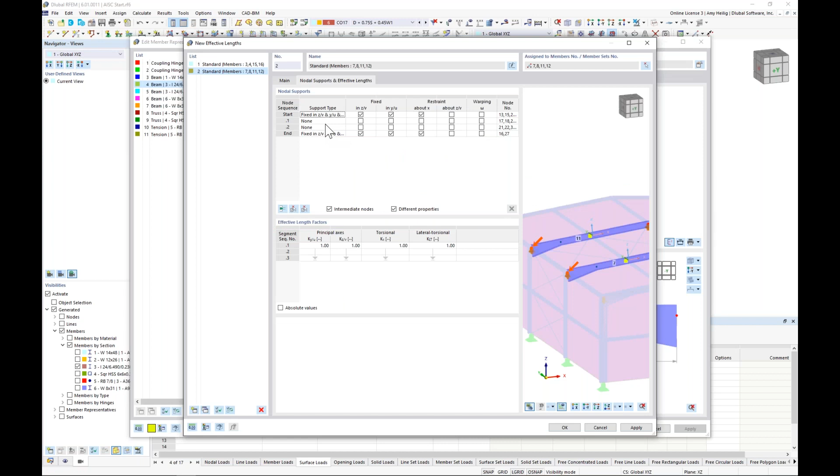Now this is slightly different. The first node we can leave as default. For the third node, I'd like to only set the intermediate support in the weak axis direction, the local Y direction. We don't have any additional columns framing up, so I can't say the member is braced in any other degree of freedom there.

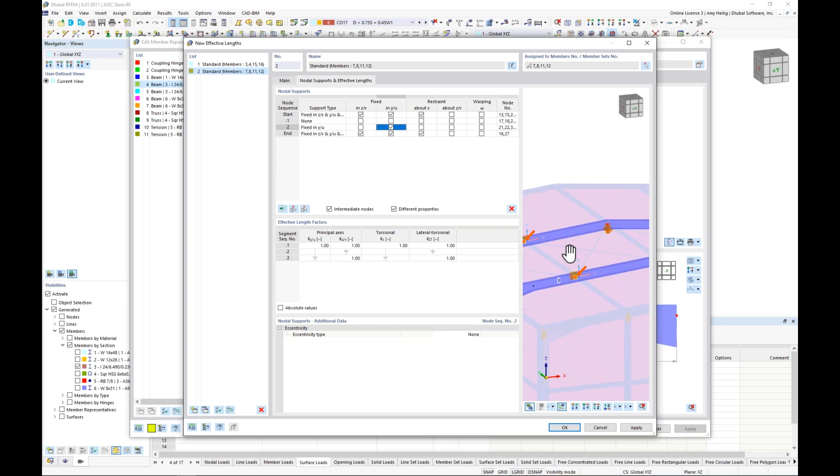Same concept for this middle node—I actually need to go back and adjust what the program automatically assumed, to brace this only in the weak axis direction, since we don't have additional columns framing up there as well.

Now, additionally, for these weak axis intermediate supports, if you want to brace them at only the upper flange or only the lower flange, you can set that eccentricity down here. Otherwise, it will assume both the upper and lower flange are completely braced. So when I click OK, we'll now see those intermediate supports set here.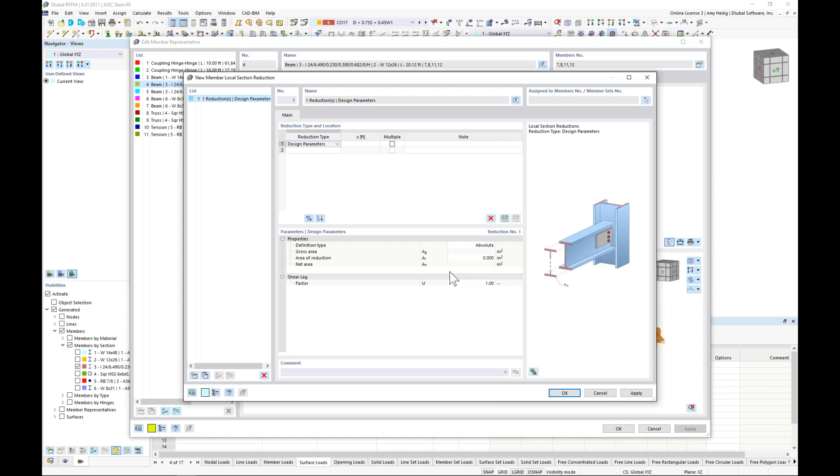Now, to quickly cover some of these other settings: local section reductions. If we wanted to create a new reduction type here, and our cross-section area is really reduced, we can go ahead and put that in for the net area.

The shear panel and rotational restraint are specific only to the eigenvalue analysis approach, and this is for lateral torsional buckling. So if we had a continuous support for the member in the weak axis direction, we might place a shear panel on it. If we had a continuous support preventing the member from rotating about its own axis, that kind of torsion, we could set a rotational restraint.

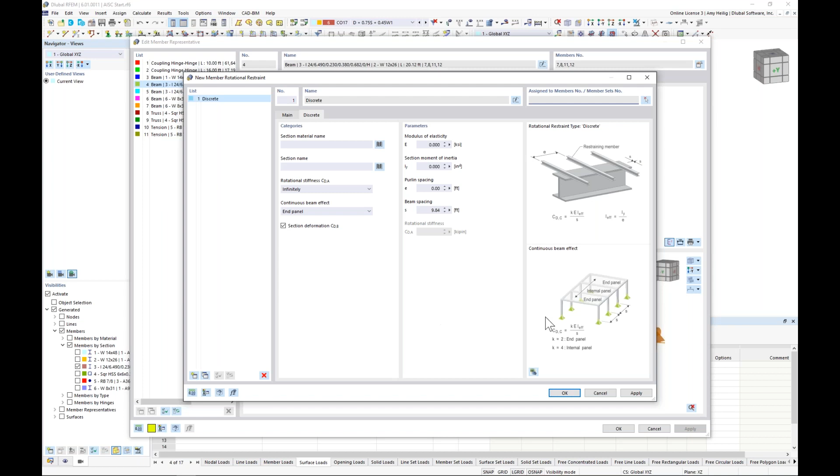Within these options, you can see we can apply some different settings to ultimately calculate a spring stiffness for the eigenvalue analysis. This may be something that you really don't get into too much.

The design configurations list strength and serviceability, specific to the AISC. Under strength, there are just some different provisions, not too much going on, so we can leave everything set as default. But under serviceability, this is where we would set our limiting deflection ratio—L/360 for simply supported, L/180 for cantilevers. We can make adjustments directly within this dialog box to adjust the serviceability configuration.

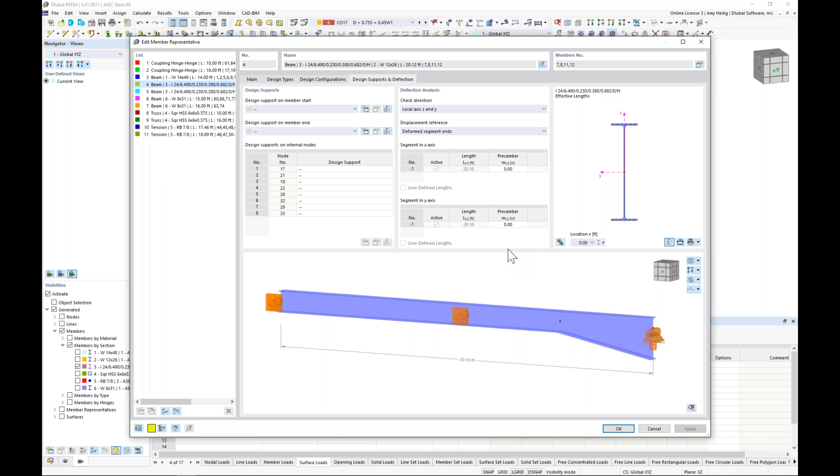Under the fourth tab, the program automatically assumes that all elements are simply supported. Now, if we have a cantilever, we'd want to define a design support at the member start or member end, and the program will refer back to the cantilever limiting deflection ratios instead. There are some additional settings here for our deflection checks, but we'll leave everything as default for today.

Now that we've set those intermediate supports, under the project navigator we can expand out the types for steel design and turn on those intermediate supports. Everything we just defined is shown graphically here. Keep in mind, this does not affect the analysis whatsoever - the analysis is not based on these intermediate supports, it's for design. So for unbraced lengths, for lateral torsional buckling, this is what those intermediate supports are going to affect.

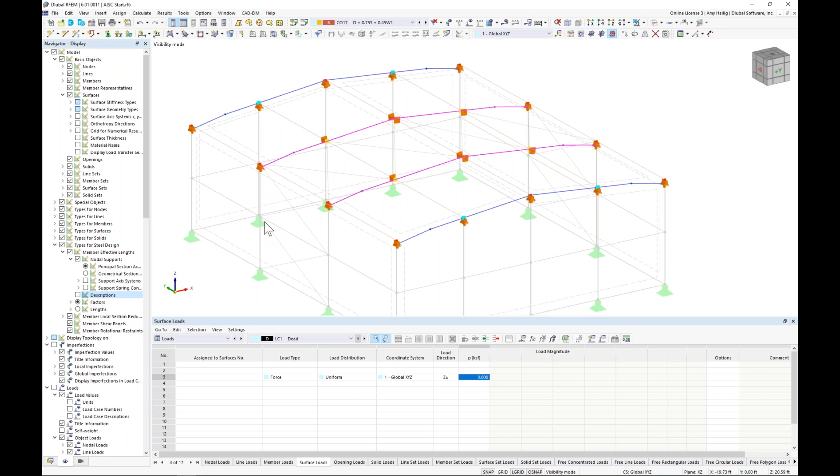The final thing to do now is jump to our table and choose the steel design from our drop-down box here. Under this first tab are our two design situations. Remember, LRFD is our factored load combinations where we reduce the stiffnesses and apply notional loads. Then we have ASD, our unfactored load combinations that we'd probably like to use for deflection checks, for example. The strength limit state type should be associated with LRFD, but my serviceability limit state design should be associated with my ASD load combination. So we make that change here.

Under objects to design, the program automatically assumes we'd like to design all objects. Let's turn this off - rather, I only want to design these 8 members that I have set the intermediate supports for. I click OK. Now, the additional tables here are just some reiteration of our materials and cross sections, nothing further to do there.

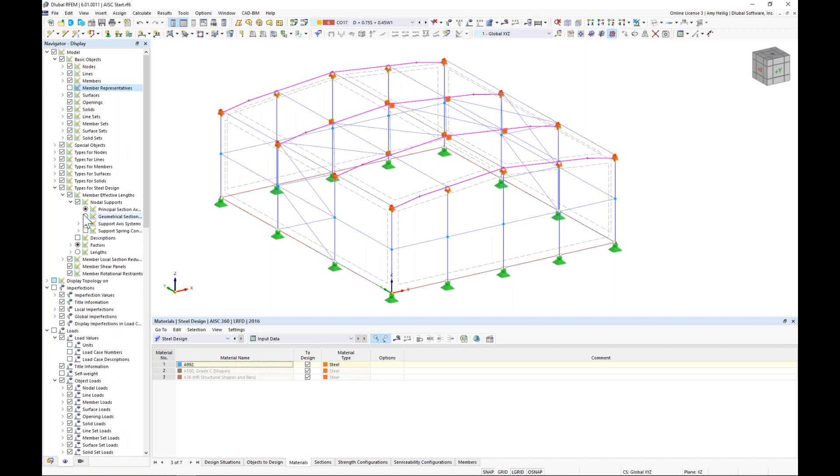So what I'll go ahead and do here is clean up my display settings a little bit. I'll turn off these member effective lengths, and we'll run our calculation by going to calculate, calculate all. The program will run through all of our load combinations at once with the multi-core processor, as well as our steel design. You can see this solves within a matter of seconds.

Ultimately, we get an additional 4th tab here within our project navigator for our results. So currently we are viewing the deformations of the structure, and we can see here the deformations available to us within the static analysis. We also can make some modifications here to what we're seeing graphically.

For example, if we want to change the cross sections to colored, and we want to scroll through these different load cases and combinations just to make sure everything looks as we would expect.

Now, in addition to deflections, we're probably very interested in the member internal forces. So we can see here axial forces, we can view shear forces, maybe bending moments in the strong and weak axis direction. So everything is shown to us here graphically.

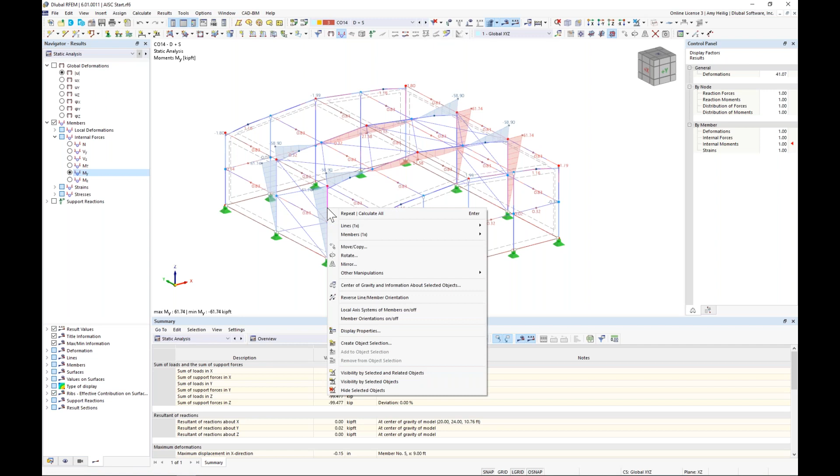But if we're interested in seeing anything in a bit more detail, we can always right-click on one of these members, go to the members option, and turn on our results diagram. The results diagram allows me to take a look at some of these internal forces, deflections, and a bit more detail along the member length. I can even take a look at different load combinations here. I can add these to my printout report.

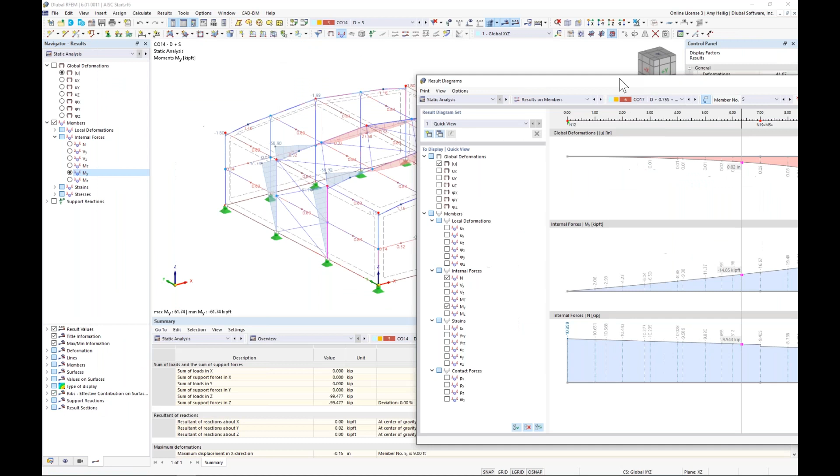We also can work concurrently within RFEM in the background. So any changes, and if I rerun the calculation, this result diagram, maybe open on my other screen, will automatically update.

So as far as the static analysis results, all this information is available in table format as well. But we're also interested in the design utilizing the steel design add-on, which we can now select under our drop-down box here, steel design. You'll see that the table's automatically updated here to show me my steel design, and I'm currently looking at the design ratios on the members. I choose this tab here, design ratios on members.

Within this table, I can go ahead and click, and notice everything is synced up in the background. That red arrow is showing me exactly where my controlling internal force is, but I'm also looking at each one of the code checks according to all of the relevant chapters within the AISC - chapter E, F, G, H, and L for serviceability here.

Now, if I'm really only interested in the controlling design ratio, you can just go ahead and use your filter options up here to choose max instead. So now I'm only viewing the max controlling check for each member.

For each one of these checks, it's important to know that we can always go up here to our design check details. This is going to show me all of my code equations, my variables, the code references, and exactly how the cross-section was classified in much more detail.

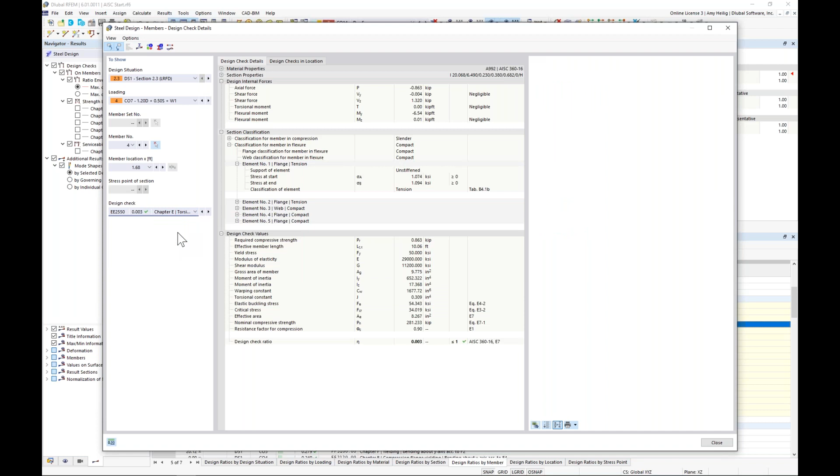We can even use this drop-down box here to choose any one of the other design checks, and we can add this information to our printout report. So we're trying to be as transparent as possible, even more than in RFEM 5, about exactly where all numbers are coming from.

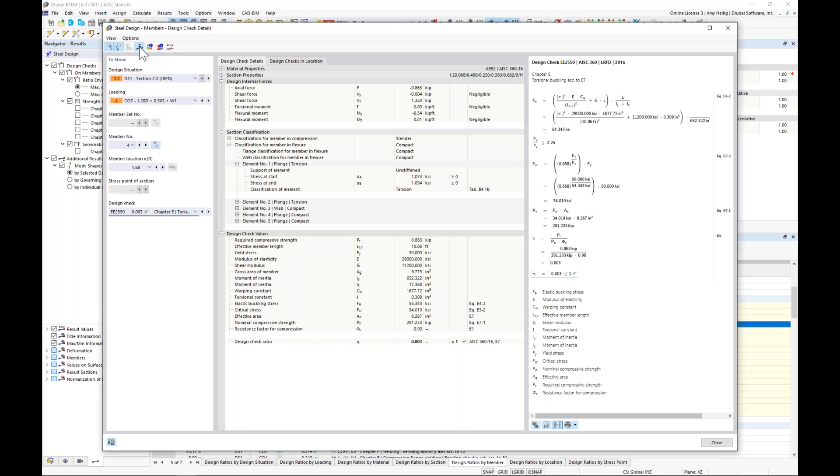So this is very helpful in just determining the background to the design check ratios. Additionally, for these members, we can visit the diagram in section. This might be helpful because we can use our drop-down box here to view, let's say, the stresses on the members. So we can see normal stresses, we can view bending stresses, including shear, for this particular section at this X location.

Additionally, we have the table format here for all of our output, but we also have the graphical view here. Notice that within this drop-down box, we're showing the steel design, and we're currently showing the max ratio here for all of the design checks, but we can turn this off and view chapter E, for example, or if we want to view chapter F. So all this is possible here.

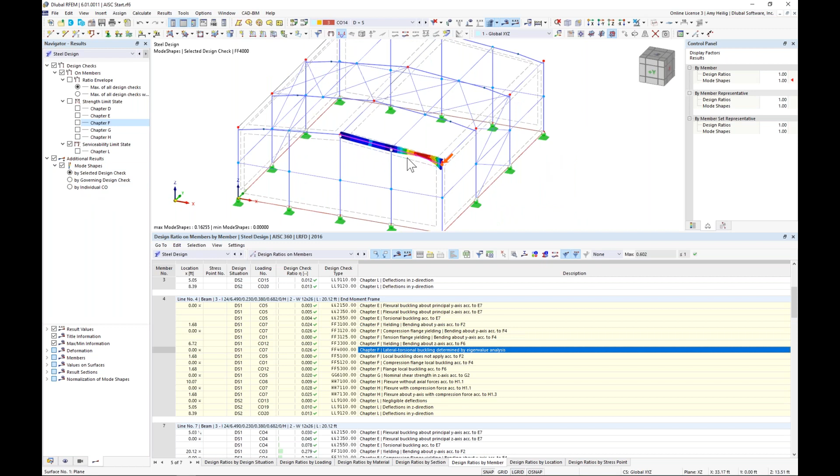Now you'll also notice that for lateral torsional buckling, we have this additional option here for mode shapes. Remember, I chose the option to calculate an eigenvalue analysis. So this is the actual mode shape here, the anticipated buckling mode shape for this member element and how my critical buckling moment was calculated. It's kind of nice to see that visually as well for each one of these members.

All right, so hopefully that was a good introduction in order to do steel member design according to the AISC within our new program, RFEM 6.